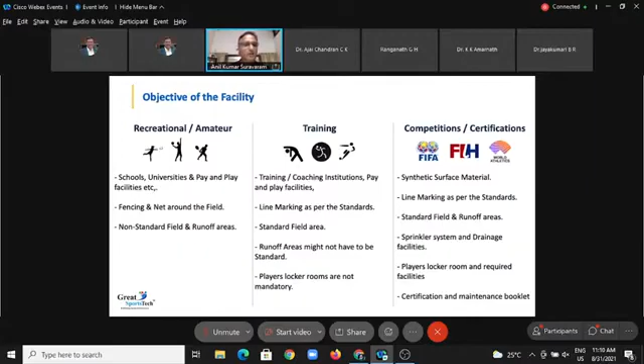Going to the specifics of the sports surface - some of this may be familiar to many, but not as familiar to all. As you know, for all outdoor fields, right at the time of planning the overall campus, you need to make sure you are leaving sufficient space with the right alignment, or orientation, so that you have a geographical north-south alignment for the field.

All outdoor fields, whether cricket, football, athletic tracks, or any other field, will always be north-south. This has to do with preventing the rising or setting sun from falling in the eyes of the players or the goalkeeper. It's important that you leave aside the total width and length required - for example, for an athletic track - because if it's in an east-west direction, you will not get a World Athletics certification, the IAAF certification.

So it's important that these are properly aligned, and the rest will follow. We need to make sure that when we do the site survey, it is done with a total station, marking existing trees or boulders. We also need to advise whoever is taking up the project, and tell them in good faith if any of these sites previously had trees that were uprooted, or had an old well or something - because without that knowledge, the contractor may not be able to give special treatment to that area.

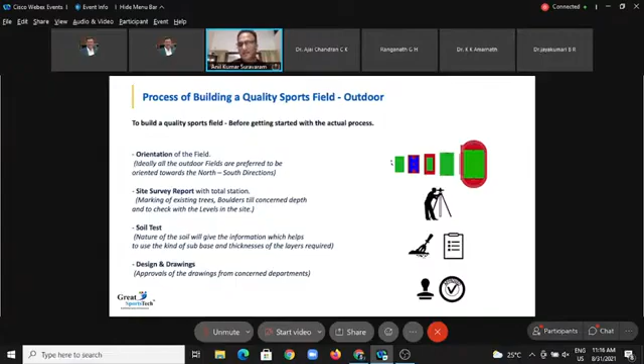So thank you for bearing with me on these two slides, which I feel a lot of you may be aware of. Again, at the cost of repetition, I wanted to summarize because these are really something that will make a big difference on how well we utilize our investment.

Okay, having said that, just going into a few things here when you're talking about, for example, an indoor facility. Are you making sure that, like I spoke about the height, the height is sufficient? Is the floor area planned well? Is it going to be catering for multiple sports?

Most of the facilities we are likely to build may not be able to afford to be exclusive for one sport, especially when doing indoor. An indoor facility and indoor stadium is a very expensive proposition, so you have to make sure that the length, width and height suffice to cater to as many sports as you can. Ideally, it should be no less than 8 or 9 sports.

There are many surfaces that allow you to conduct many sports, especially polyurethane or polyvinyl chloride, what is called cushioned PVC, like Taraflex or Omnisports. There are also wooden floors that are very popular and very long lasting, and they are good as well. Sometimes you may need to have some mats on that.

The point is, everything from the color in the background matters. For example, because you're using a white shuttle, you cannot have a white color background. The seating should be of a color so that the shuttlecock is contrasted against the seating background.

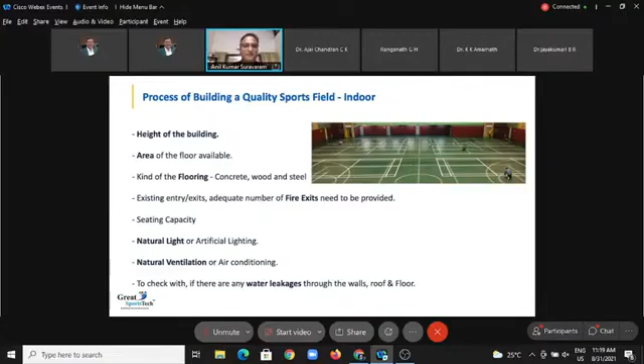Now diving into these specific surfaces, I'll be touching upon some 6 or 8 types of surfaces. I'm starting with the most simple and most common, something all of you are familiar with, which are called acrylic courts, or more popularly called synthetic courts.

Technically the name is an acrylic court. Anything man-made, anything not natural is synthetic, so just saying synthetic court may not be the correct term, because synthetic can mean acrylic, like in this case, or polyurethane, or polypropylene tiles—anything man-made. So it's always better to clarify as synthetic acrylic court.

These are also called hard courts and are very popular—I'm sure most of you have them in your campuses. They are popular typically for tennis and basketball outdoor. However, because of the lack of indoor facilities in many places, we may also use these for volleyball and badminton, which is actually not what they are suitable for. But nevertheless, these are less expensive, fairly good outdoor courts that are commonplace, so these are good to have.

Within these, people typically tend to say they want an 8-layer cushion system, which is good to have, but that is something you may need only at the highest level. Examples where hard courts are played at the highest level are the US Open and the Australian Open, among quite a few other tournaments.

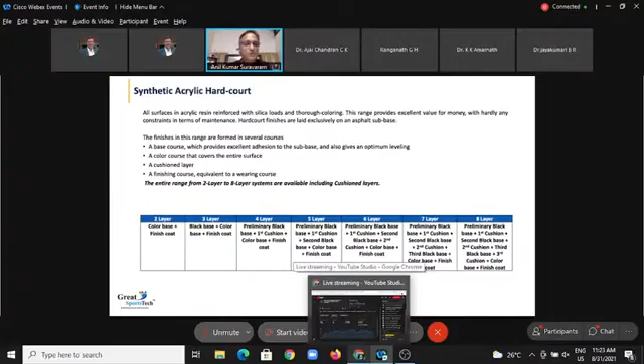These are good, but the limitation is that they are very susceptible to damage from wrong shoes. For example, if somebody comes with very hard shoes or spikes, the surface tends to get scraped. You cannot allow someone to play football on that. If students play football, the shoes they use may scrape the acrylic layer off. Or if people play cricket in colleges, where students want to play any game on any playing area not realizing the damage they may do, the cricket ball can again cause damage and erosion. Also, you cannot use this for non-sports activities, you cannot even place plastic chairs on it and risk scraping away the surface. So these are cost-effective surfaces, but they have pros and cons, and I wanted to touch upon those.

But the construction itself, typically, I will not go into each step, but basically a bituminous surface is the construction that is most preferred as a base. The bituminous surface involves treating the basic ground, then, starting from the left top corner, if you go down that row, you have a 40 mm stone layer, a 10-20 mm layer, then bitumen, and basically asphalting - a BMBC, which is a bituminous macadam, and a bituminous carpet. And then you do the leveling.

It's generally manual work because these areas are too small for sensor pavers to be operated. So there's usually a risk of some undulations, which is why the top right picture shows how, after doing a seal coat, we do a watering of the whole surface to identify any ponding. You have to remember that the International Tennis Federation allows some level of standing water, up to about 6 millimeters, 30 minutes after it has stopped raining. So there are some guidelines. You will generally not have a completely ponding-free surface - small spots people sometimes refer to as bird baths are fairly common. You use something called a leveling slurry to level them out as best as you can, and I'd emphasize it should probably be no more than 1 to 2 millimeters.

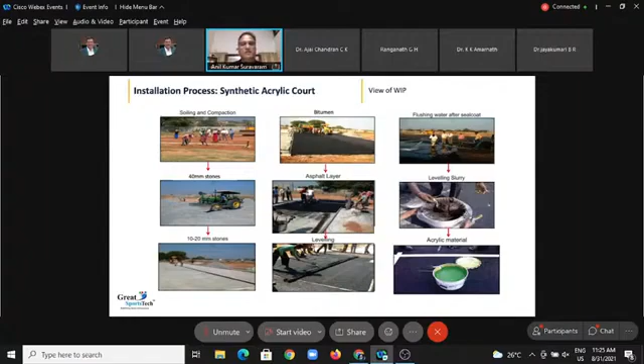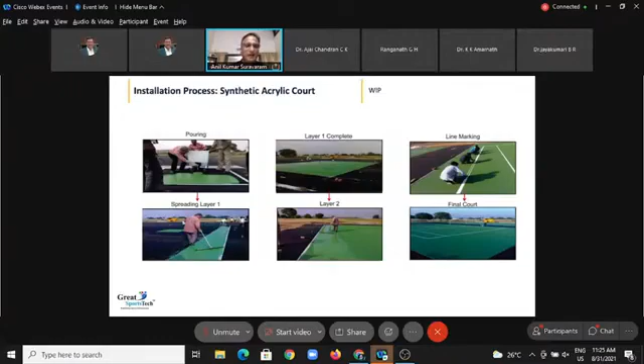In a tennis court, the slope is generally to only one side. Unlike a football field, where you may have slopes to both sides, in a tennis court it is typically only to one side, about a 1% slope. You cannot make it too steep, you cannot exceed 1%, and within that you have to do the best you can. So experienced court builders are preferred, who will be able to build a very good sub-base with the acrylic and bitumen, and then the acrylic surfacing is done. These are just the steps of how it's all done, and of course you have basketball courts, tennis courts, and various other types that people do have.

Now I'm coming to an option that's fairly popular in the recent past, both for indoor and outdoor use. These are a little bit more expensive than acrylic courts - I would say quite expensive. Just to give you an example, an 8-layer acrylic system may cost anywhere from about 80 to 100 rupees, depending on the quality of material and installation - that's just the acrylic surfacing. The sub-base cost may be different, that itself may be another 75 to 100 rupees per square foot.

However, a polyurethane surface alone, excluding the base, versus say at the higher end, say 100 rupees for an acrylic 8-layer, this could be upwards of 300 and typically even up to close to 400 rupees a square foot. So it is that expensive. But of course, this is much more long-lasting, much more cushioned, much smoother finish. Many benefits to this, but it is typically 3 to 4 times more expensive than an acrylic coating.

These are, of course, good. There are types that are suitable for indoor and certain types of polyurethane. This PU is basically polyurethane, which are suitable for outdoor use.

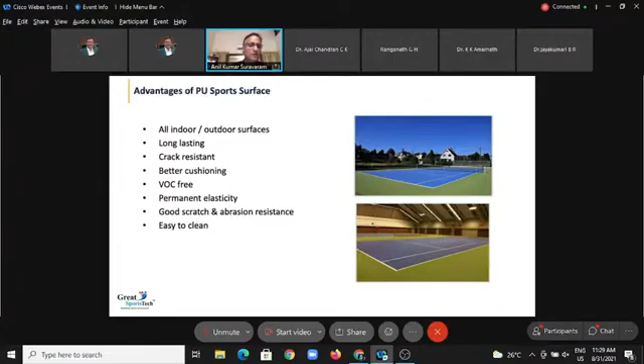So these are things that you want to be very careful about when you are using some of these synthetic materials. Make sure that you are getting them from a very good, reliable source. I would say that the standards of production typically in some of the European countries and in America are very safe to have. Even if they are a little bit more expensive, generally they are longer lasting and safer to use. Just my suggestion on those lines.

Like I mentioned, the bottom that you see here is the rubber pad layer, and on which you have various other layers that come in and finish off with the polyurethane layer. You have an intermediate layer, you have a solvent-free top coating. I don't want to go into too much detail, but this is broadly how these are, so that we are able to touch upon more of these without losing too much time on any one of them.

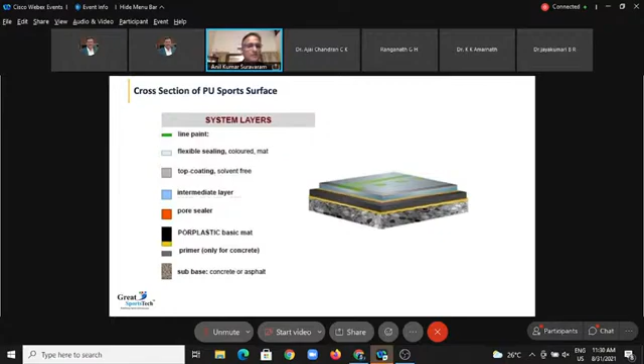This is how a good polyurethane coat can look. This can sometimes be similar to how it will look even with polyvinyl chloride, the PVC, Tarkett, Omnisports, or the Taraflex kind of coats from many suppliers. So these are the kind of surfaces with polyurethane.

However, in the recent past, there is something that has come that is called a hybrid PU. So this is actually having a combination of both acrylic, where you have the acrylic layers at the bottom and the polyurethane layer at the top. So somewhere these are turning out to be not as expensive as a polyurethane coat, but they give better cushioning, less ponding, better finish than an acrylic coat. So they may be, for example, only 50% higher cost than an acrylic coat, not a 300% higher cost like a PU coat.

These hybrid polyurethane coats are beginning to be quite popular. We are doing quite a lot of them now, and users are extremely happy. There are some sites done in Bangalore as well, including schools and corporate campuses. I won't go into too much detail, but essentially acrylic layers are done first, and later polyurethane coating comes on top, giving the best of both worlds.

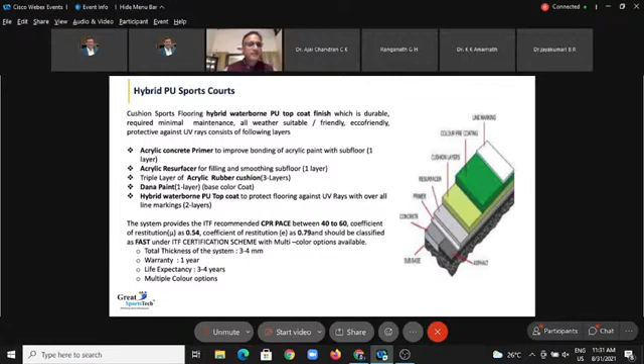Sir, you are muted. Can you unmute yourself? Sorry. Yeah, I didn't want to go into too much detail about the comparison between acrylic and hybrid. Briefly, I mentioned the 2-3 key points.

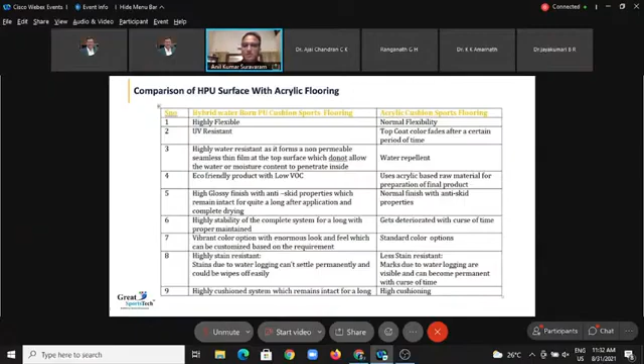This is what it actually is. Then we have what some of you may be familiar with - interlocking modular tiles, also called interlocking modular sports tiles or interlocking modular polypropylene tiles, because PP is the material with which they're made. You have choices for both indoor and outdoor use.

This is an example in Bangalore itself, in Tesco, where we've done an indoor court used for badminton and various other sports. But there are many examples of how they could be used outdoors as well. They are very long lasting - typically over 20 years, maybe even 25 years.

They have different levels based on the surface underlay - could be with cushion systems, rubber cushioning, or just directly on the surface itself. By the nature of their interlocking design, they can be permanently placed, but they're obviously portable as well. You can dismantle the entire court and move it elsewhere later if needed.

For whatever reason - a new building coming up, or whatever - your investment is reasonably protected. Being outdoor grade material, there are no issues about rain. And if the base is good, there's no risk of water standing. Very easy, high ease of maintenance.

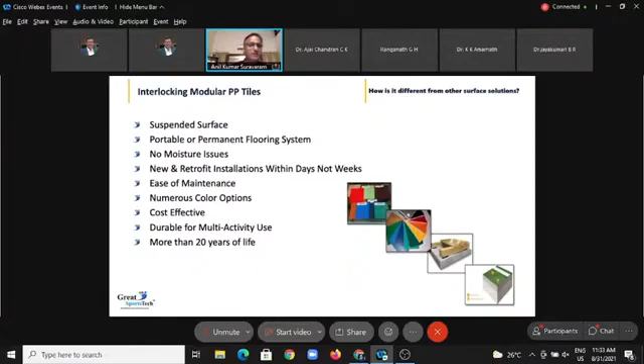You can also use these for multi-sport and multi-purpose activities. Most of these are typically approved by FIBA and by ITF, the International Tennis Federation. They're also good enough to place furniture on and have any event. For example, here's how the ShockTower - some cushioning is provided by rubber shock towers.

These are actually polypropylene tiles, but with just a wooden color laminate on top. This is not a wooden surface, but it can give you a wooden kind of finish, just to look like a wooden court - these are polypropylene. This one is a maple finish, but of course it has nothing to do with maple wood as such. So you have options like these.

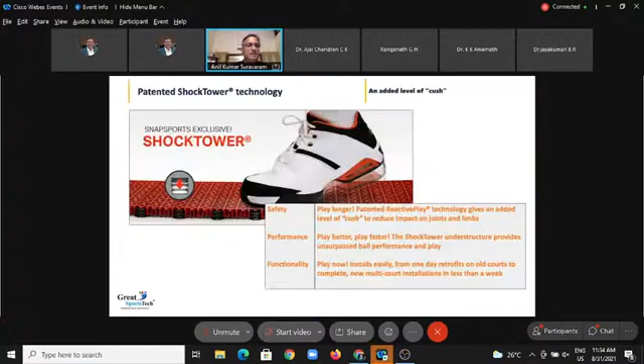There are instances - let me see if I have an example - where schools use this in an indoor hall, which may double up for play areas during the day. It can also be used for stage events - a parent-teacher meeting, an annual day, a cultural fest, or even a cafeteria. So these polypropylene tiles are, in that sense, very versatile, suiting various purposes - truly multi-sport and multi-purpose.

You can, of course, do multiple line marking, which is what you should look to do on any surface, indoor or outdoor, especially in a university context, where you try to provide students with as many sports as possible that can be played on a single surface. This provides you those options to do multiple line marking.

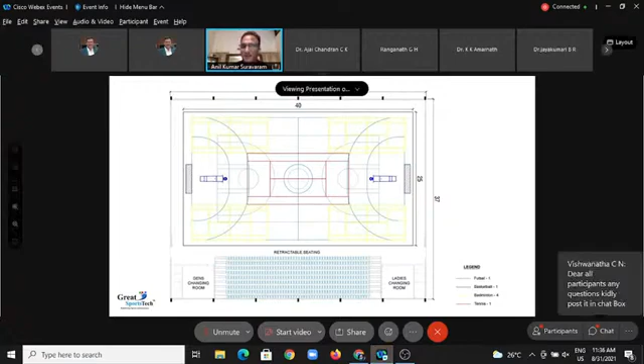Again, this is an example of how, even for an indoor facility, you need sufficient planning - same holds true for outdoor. You can see that with various colors, different sport markings are provided. When you look at it like this, you may wonder if the sports person will get confused. But I'm sure all of you are sportsmen, as have I been, and we know that when playing a certain sport, our mind is sharp enough to pick up only on that particular sport's line marking.

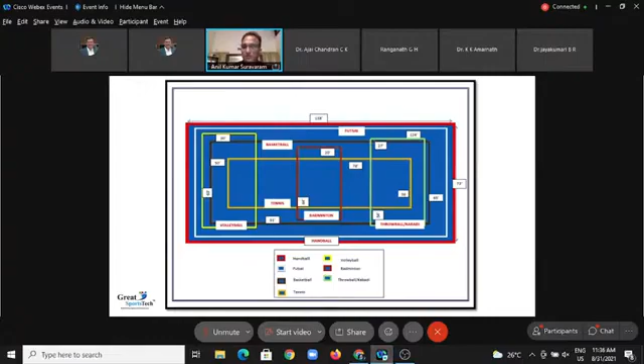So these are ways of how you can accommodate various needs when we are speaking about multi-sport and multi-purpose facilities, the fact that whether an outdoor or indoor facility can be designed to cater for various sports like these. So these are some examples of where they have been done.

Now I'm coming to the cushioned PVC. We spoke of it briefly earlier, what some of you may be knowing as Gerflor, what may be known as Taraflex, and what are known as Omni Sports or various other such systems, which are cushioned PVC flooring. They come in rolled form, with thicknesses ranging anywhere from 3.5 millimeter and going up to maybe almost 9 millimeter.

As you can see here, I'm giving an example of a 6.5 millimeter intermediate level, where the thickness is usually made up mostly by the rubber layer below. Only the top 2 millimeter is what is called the wear layer or the PVC layer, actually the polyvinyl chloride layer coming on top. So the more thickness you have is only to provide more cushioning, and certainly the lowest level thickness is sufficient enough to play.

It is very inexpensive, but it may not provide the best cushioning. However, the intermediate range like 5 millimeter, like the 6.5 millimeter, are very useful and appropriate for a university or a training level facility. And only the 8.5 millimeter, 9 millimeter thicknesses are the ones that may be required only if you're hosting a national or international level competition. In this context, I must also mention that you do get portable rolls as well of PVC.

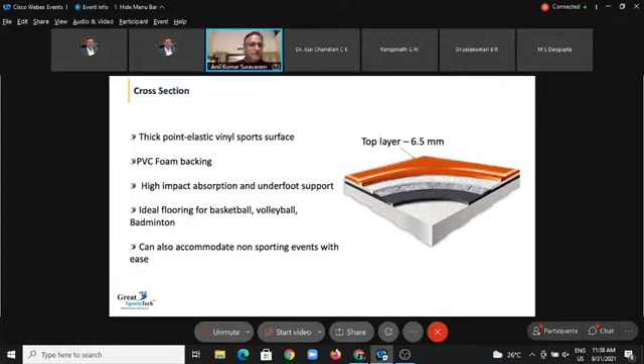For example, many of you have heard of these Yonex mats, and nowadays Li-Ning also does this. There are many other companies, including Target or others, who do portable mats that may be suitable for badminton. These are typically, because of the fact that they have to be portable and easy to handle, only in a 3.5 millimeter and no more than 4 millimeter thickness. So that's where you have the portable option also with these surfaces.

Of course, cushioned PVC is suitable for large areas. When you are going to use it for non-sport events, you can cover it with some protective surface like a tarpaulin and place simple light plastic chairs on top, using it like an auditorium for non-sport purposes. But these surfaces typically are very, very versatile. Again, they are certified and suitable for almost every indoor sport, from handball to volleyball to badminton to basketball to tennis, you name it, they are suitable.

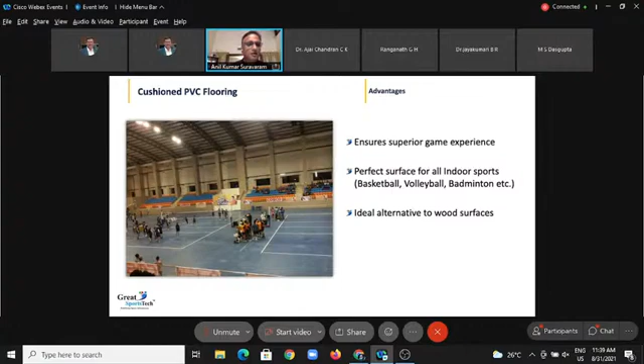So PVC cushioned flooring is really a good choice as well, including other options like polypropylene tiles. There are also polyurethane surfaces. So there are all these benefits that you have with them. I think I touched upon some of these points already. There are some installation aspects that I'm not going into too much.

For example, I spoke earlier about the dampness that may come from the ground, even through concrete flooring, and how we usually try to make sure, first of all, that the concrete floor itself is extremely leveled. Unlike outdoor, where you have to provide a slope for rainwater to flow away, indoor, you always have to have what is called a 0-0 level, a complete 0-0 level. It has to be an absolutely flat surface.

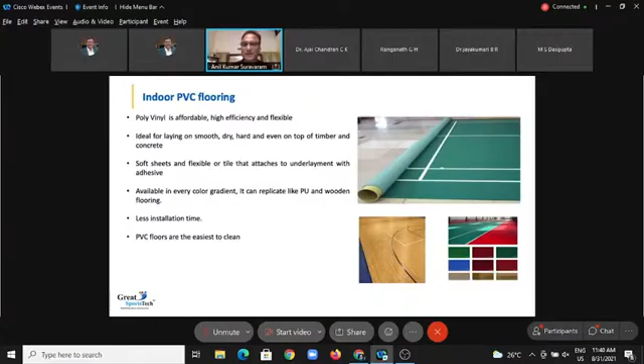A VDF kind of cement flooring is done, and there are many ways to make sure that it is 100% flat flooring. Apart from that, prior to laying all these surfaces or even laying a wooden floor surface, there is a vapor barrier. It is very thin, like a few millimeters, up to 6 millimeter. A vapor barrier is laid, which prevents moisture from below coming up through the surface and affecting your sports surface. So those vapor barriers are really important to have. With these finished surfaces, you can even get them in wooden finish also, like with the polypropylene tiles I mentioned. Even in cushioned PVC surfaces, you can get a wooden coat finish if people prefer to have that.

Going over to some of the turf related things, I'm giving an example of hockey turf here. I mentioned specifically hockey so you can see these huge water jets, with water guns as they call them, that are used on a synthetic surface.

Now you may wonder why a synthetic surface needs water. In the case of hockey turf, it's a very short fiber, and the nature of tufting is such that with very short fiber, these are typically much stiffer fibers, and they are very closely tufted. So you actually have a fairly abrasive turf used for hockey.

But the nature of the ball and the play are such that you cannot play hockey on what would be suitable turf for football, which may be a 50 to 60 millimeter tall turf with infill of silica sand and rubber granules. Here, there is no infill, you are directly playing on turf. Of course, below the turf, you have a shock pad.

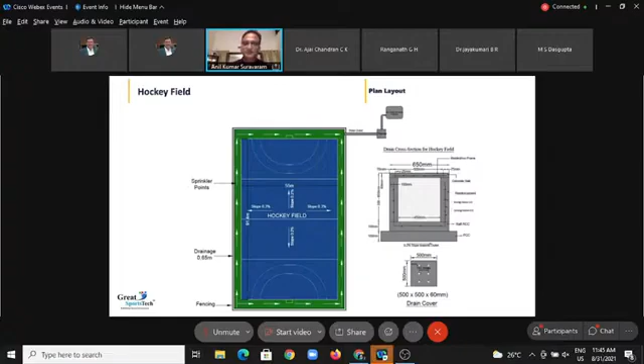There are details of the sub-base. This is also an asphalt sub-base, like a bituminous sub-base. And therefore, like I mentioned earlier, you will have some slopes for the subbase.

A bituminous subbase is fairly standard, except that you cannot bring in a road contractor and expect him to build a hockey subbase. This is a mistake many people make, in fact many governments and sports departments do. We struggle to explain that whatever standard rates are defined for road contractor bituminous work, they expect us to do the same work for very high precision and very high quality hockey subbase. So that's a struggle we have.

But anyway, that's a different story. These subbase cross sections may also be available online. This is something we have done in-house internally for our clients.

So there are layers of how these fields are built, and every layer with what quality. There are tests as to how to test the material used, the density, how many kgs per square meter, the depth, overall thickness, and the porosity, various factors are calculated. You have a perimeter drain on the side to ensure that the watering you do for the field is slowly taken away, and even rainwater needs to keep going away.

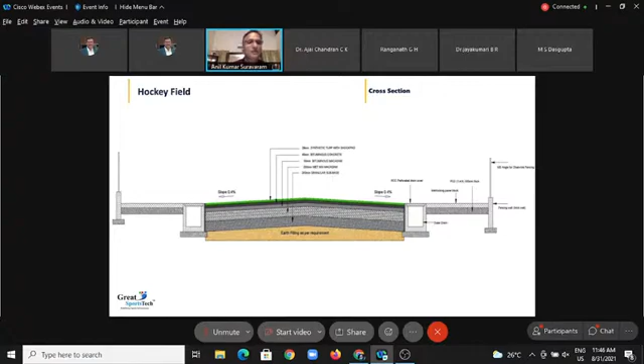So now you may know why you see that splash on a hockey field when they are playing. That's because it's actually intentionally watered. Blue color is a popular one, but green is really more common. And that's how we do that.

In terms of building a hockey field of the highest quality internationally, FIH have set down certain guidelines, and they have designated certain companies worldwide as FIH certified field builders. We are happy to say that we are one of the FIH certified field builders. The turf production also has certain standards, and they have designated some turf companies as FIH preferred suppliers. So these are a couple of things you can look into whenever you're looking to organize that.

Here are some pictures of how the subbase is built. I will not take up too much of your time on this — many of you are familiar with how these subbases are built.

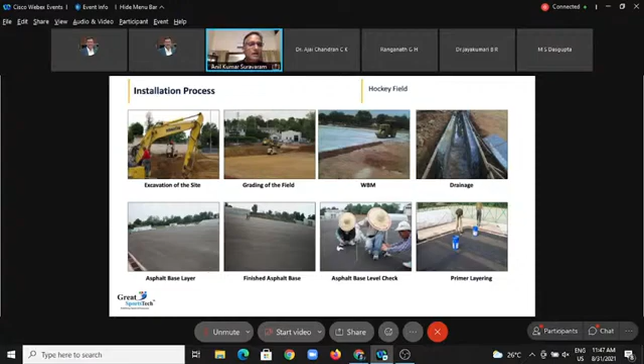And of course, then we do a shock pad layer. There is a shock pad below the turf, typically 15 millimeter, and it is cast in situ. The binder chemical and the rubber granules are mixed together in a mixer and laid with a sensor paver, conforming to the slopes, thickness, and everything.

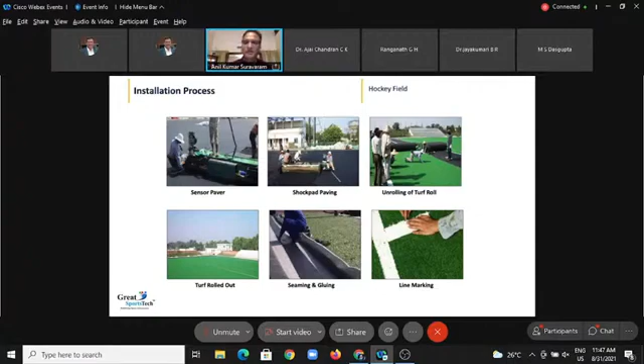And on top of that, we do the turf layer. This is how a finished field looks — I'm sure all of you have seen many of those, or may be having them as well. This is a field we have done in Secunderabad for South Central Railway.

Incidentally, talking of Karnataka, since most of you happen to be from there, we have recently finished a hockey field in Kodagu, in the Somwarpeta area. We have also done quite a few other projects — tracks, football fields, and other things — in various locations. There could be over 20-25 large projects and maybe over 200 medium-sized projects we've done in Karnataka.

I have some videos to play, but in the interest of time, I'll just skip them for now. I'm probably taking up way too much time. Dr. Vishwanath, if you can tell me how much time is remaining, I will try to finish the session in that time, please. So you can go ahead, sir. No issues. Okay, I'm sorry, I'm probably taking up much time. I'll try to expedite a bit.

Apart from the water-based system, where you do need water at this time, the international competitions are held on water-based systems, and therefore the highest level training facilities have to be water-based systems. They are expensive both to set up and to maintain, because you need typically 60 to 75,000 liters of water per session of play. So you really have to build, for example, a 2 lakh liter tank to store water, and sometimes people store much more because of the unpredictability of water availability.

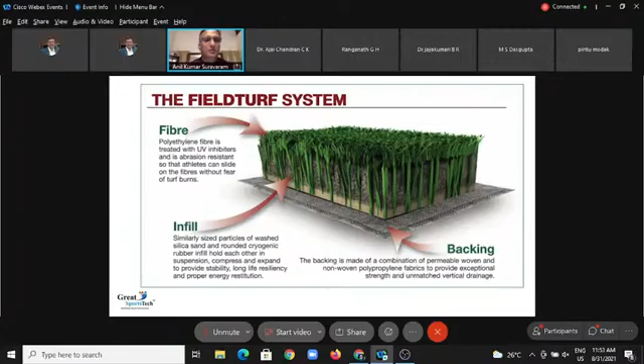So there are some defined tests, and there is a vertical deformation test as well. There are 7 such tests done at various parts of the field. If your infill ratio is not correct, your surface will be either too hard or too soft. Of course, there are ways people sometimes bypass this just for the initial test, where they may make the system sufficient for the initial test, but 6 months or 1 year later it may turn out to be too hard. So these are reasons why the infill is important to calibrate very correctly.

As you all know, the maintenance is almost maintenance-free, I would say. There is some minor maintenance, but I won't take up too much time on that. All-weather playability, you don't need watering. These are outdoor-grade materials. They typically run about 10 to 12 years with reasonable maintenance, and it can be a bit longer also. They are truly multi-sport, though they are primarily designed for football.

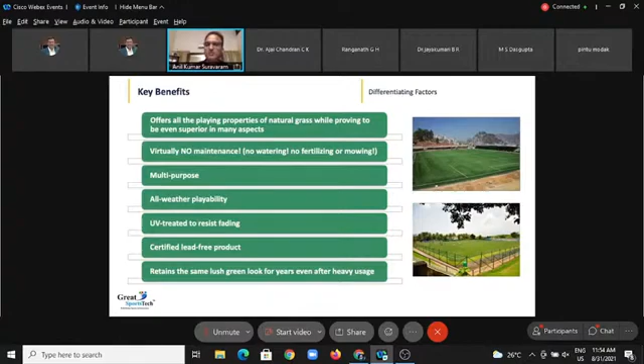Like I mentioned, similar to FIH's preferred supplier, FIFA has a program called the preferred producer. There are some 6 or 8 worldwide turf producers who are conferred with this category called the preferred producer. And like I mentioned earlier, FIFA certification of a finished field has 2 categories. Like I said earlier, it used to be called 1-star and 2-star. Now they are called FIFA Quality and FIFA Quality Pro. So those are the 2 varieties.

So it's a fairly soft subbase, and the rainwater actually percolates down through the subbase itself. It can be going into the ground, but because we have to keep a field ready for usage even during or after a heavy rain, there is a perimeter drainage system also that is done with some drain pipes.

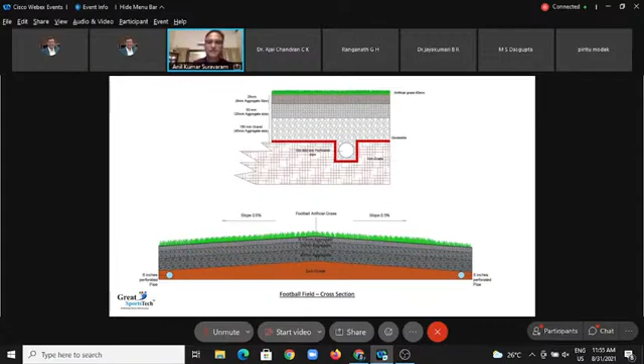Generally, these fields are designed to drain fairly fast. There are some designs, like in the case of FieldTurf, where they're designed to drain water faster than the pace of rain, so the play can continue even while it is raining. So this is a little bit on that.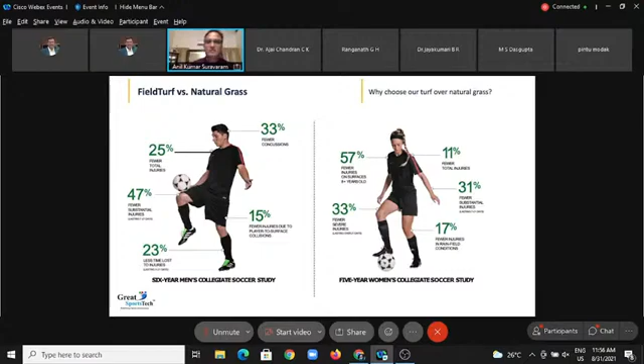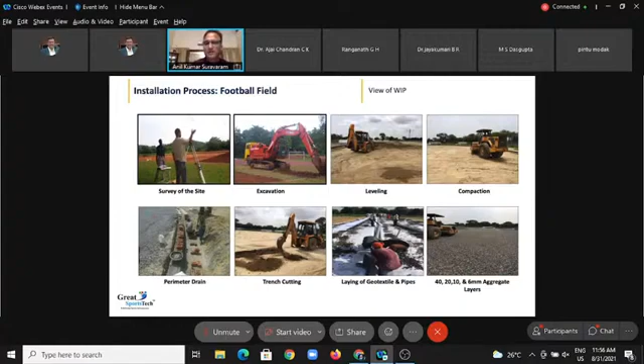I'll skip this slide, which is just basically the advantages or the pros and cons of field turf or synthetic turf versus natural grass. I've explained a bit about how the subbase is built. The initial levels are the same. After that, it's only a crushed stone base, finishing off from bottom with the 40 mm, 20 mm, and 10 mm layer, and then you have the 6 mm and stone dust kind of layer.

And then you get into the turf laying, where there are ways of doing it, stitching or gluing, and stitching is usually the most resilient. And then how you infill the whole thing.

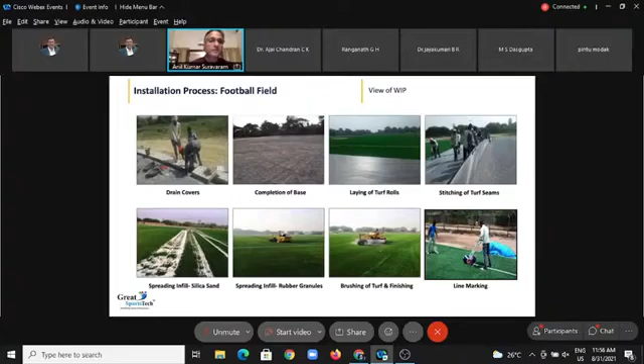When I say infill, you have to put in a lot of silica, sand, and rubber. Typically, a football field will have almost 280 to 300 tons of infill. You may have about 160 to 180 tons of sand and about 100 tons of rubber. So that's the amount of infill that will go into a long pile field.

Coming to synthetic turf for multi-sport, the same turf is used, though it is not actually meant for athletics, but in some schools they may lay it in the shape of an athletic track, and inside they may use it. It is also at an amateur or recreation level, they may use it for volleyball or for cricket academies or a children's play area.

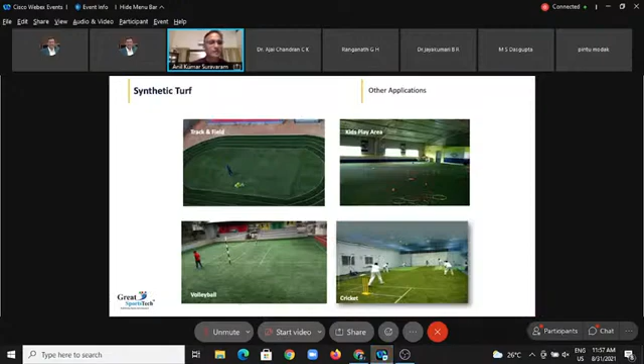All these are fine. Incidentally, for volleyball, we have done probably hundreds of courts, especially for the defense, Indian Air Force and others, who find this a very good recreation thing, injury-free and maintenance-free, better than the normal hard ground courts that they would generally have.

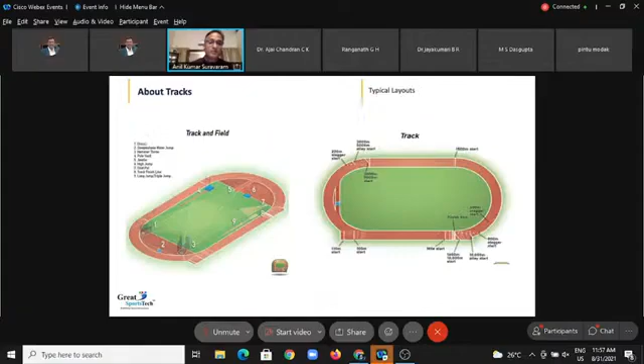Synthetic athletic tracks, again, something most of you are familiar with, so I won't take too much time on dimensions. You need to be aware that you don't always necessarily need a 400-meter track. You can many times make do even with a 200-meter track if it is at an amateur level, or if there is a constraint of space or budget.

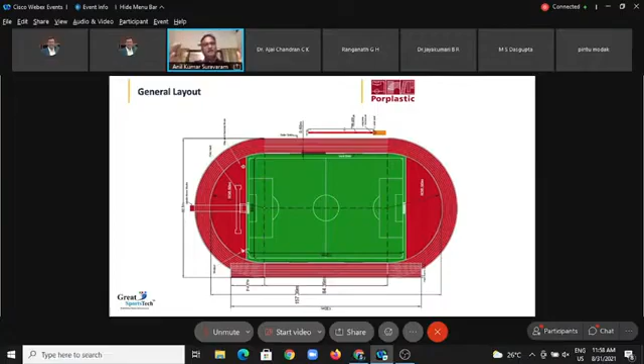And unlike a 400-meter track, we should not visualize that the 200-meter track is half the size of a 400-meter. A 200-meter track is only 1/4 the size of a 400-meter track.

Sorry, just give me one minute, please. Okay, I'm back. Sorry, I had to just, there's some noise in the background.

Blue color tracks are very nice to see, but you don't necessarily need to invest in a blue color track. They are more expensive, being very susceptible to ultraviolet rays. You need to have a UV seal coat that is done. We have done some of these tracks, but mostly the terracotta, brick color tracks that you see are more common.

Athletic tracks, as you know, are long lasting, and of course also very expensive. A typical 400-meter track could have 6 lane, 8 lane, or 10 lane. This is an important point, because you don't need a 10 lane unless you're actually going to host the Olympics. Otherwise, most tracks, even at the international level, actually have only 8 lanes.

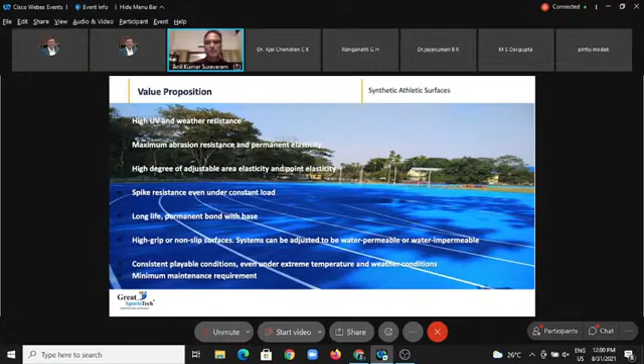In this, you have 2-3 varieties. The most popular is actually what is called the full PUR. You may have heard this term, full polyurethane. This is basically full polyurethane.

Basically this means the athletic track is laid in 3 layers, and all 3 layers are going to have polyurethane, which is really the heart and soul of any athletic track. This is called full PU, or full PUR. It is more expensive, and each layer is done with polyurethane mixed with rubber granules.

The polyurethane is what gives the color to the track, and if you use a terracotta, brick, or maroon color polyurethane, you'll get a maroon colored track. The top layer that you see is usually finished with EPDM granules, as you can see here. The EPDM granules are of the same maroon color, and therefore you get a maroon track.

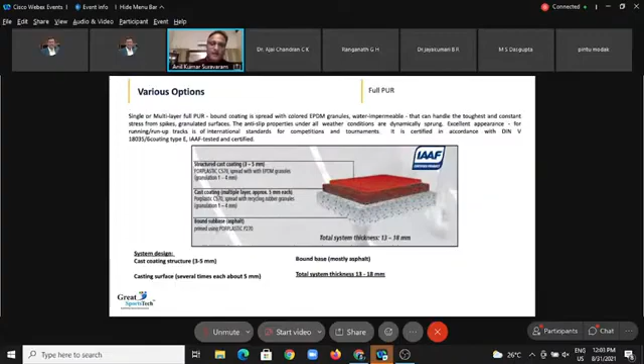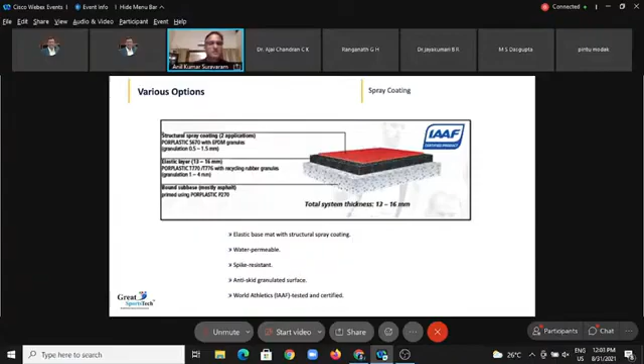Apart from this, there is another system not relevant for India, called the spray coating system. It's done where you have a 10 millimeter shock pad, but on top you just spray polyurethane with an airless sprayer. It is not at all recommended, please don't even consider that. It has many limitations.

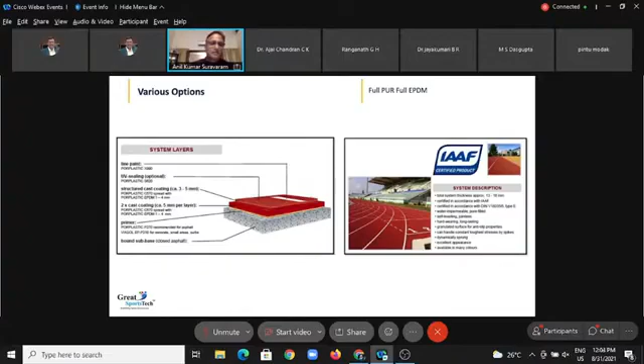So those are 3 types of athletic tracks. There is also a less common system called full PUR full EPDM, where in the bottom 2 layers, instead of SBR, EPDM rubber is used. It provides enhanced cushioning. We've done this for the Indian Air Force Center in Jalahalli in the Bangalore area, which has this full PUR full EPDM track. But it's probably too expensive for regular usage. I think a sandwich system or a full PU system suffices.

I've explained the sub-base construction process, and you've seen how the shock pad layer for a hockey field is done. It's the same for an athletic track. Then with the polyurethane, it is cast in situ, you actually pour it on the surface after doing the pore sealer and other such layers.

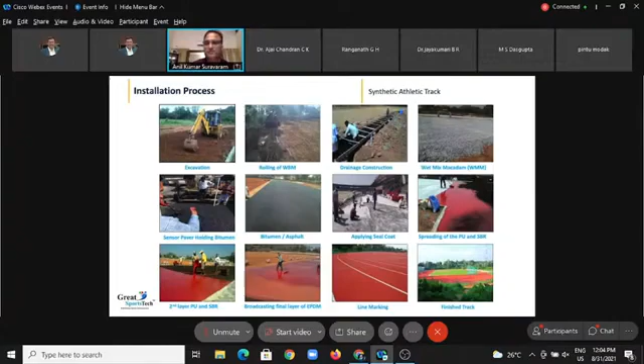Then using what is called a squeegee, like a wiper, you pull the self-leveling polyurethane liquid across the surface. Then you broadcast, spreading and throwing rubber granules on top until fully absorbed into the polyurethane. With spades, you shovel the EPDM rubber onto the wet polyurethane, which absorbs into the surface, and once it dries it becomes the finished surface. Like I said, there are class 1 and class 2 certifications.

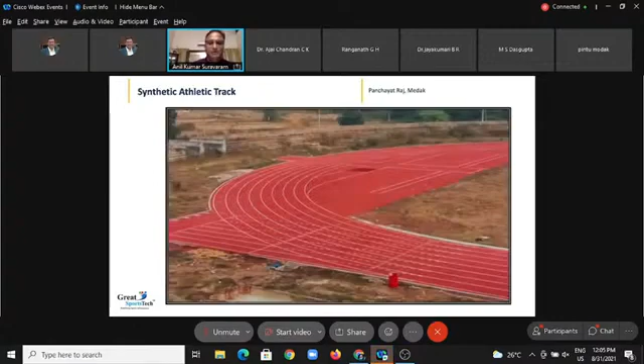This is how a synthetic track would look like. We have to touch upon that - just a rough idea, since we already covered the athletic track. The total area you may need: length and width, 90 by 45 is the play area for a national level.

100 in length and 64 in width is the minimum play area for an international level, but this excludes the runoff area. You need at least 3 meters or minimum 2.5 meters on the length and at least 2 meters on the side. So you generally end up with 2.5 meters on the length - adding that to 100 gives you 105. On the width, 64 plus 2 plus 2 gives you 68. So this is the basic minimum area you need.

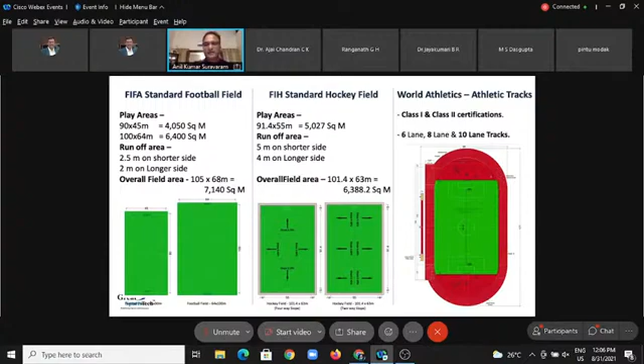After that comes the drain area, dugout, and fencing. Even in athletic tracks, you'll be able to easily calculate the total length and width you need to earmark - fairly easy depending on the number of lanes you have. There's a lot of information available.

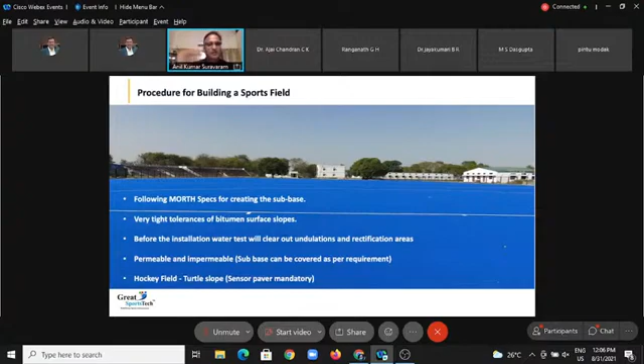This is a term you'll see very often - MORTH specifications, by Government of India, regarding construction of bituminous surfaces. They have to be minimum MORTH, but to conform to international standards it has to be far more precise than just MORTH surfaces. Then there's a classification of whether you have large granular or less granular, permeable or impermeable bituminous surfaces.

Regarding slopes - we've touched upon this in some context. For an athletic track, the slope is inward, unlike football and hockey fields where the slope is away. In an athletic track, from your outermost lane, the slope is inward. It also provides light banking, but more importantly, it allows water to flow inside, so an inner drain is actually more crucial in an athletic track.

Then there are high stress areas - typically long jump, pole vault, triple jump, javelin throw, and high jump areas. So instead of the typical 15 millimeter thick athletic track, those areas are typically 20 millimeter, and some are even 25 millimeter thickness.

There are many ways these areas can be optimally used. Sometimes people are able to make do with just 1D and not necessarily do 2Ds, so on a case-specific basis, we'll be able to advise.

Historically, natural grass has always been the preferred choice until the last 20 or 25 years, when synthetic surfaces became very common. Now, in the recent past, something has come up which is a mix of both - a hybrid grass solution, a mix of synthetic turf and natural grass.

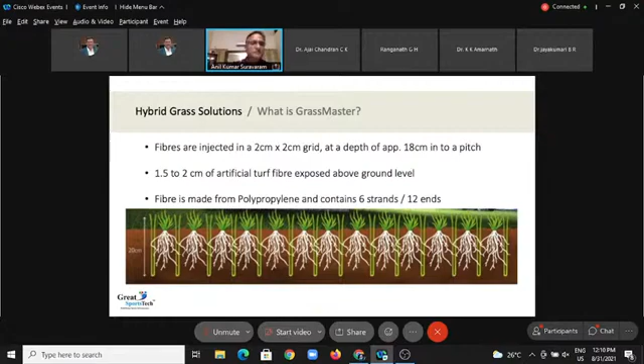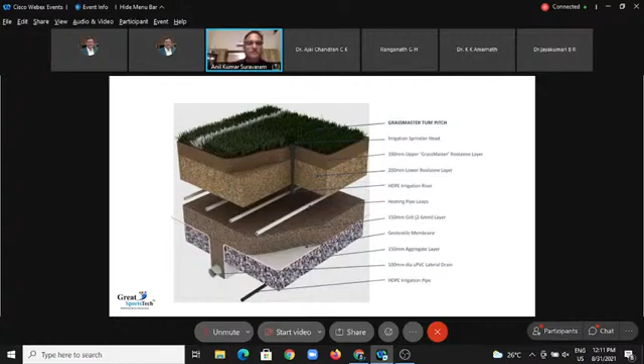So I won't go into too much detail, but basically there is something called a USGA base, a certain standard for a sand-based sub-base system that is built, and that is the grass growing medium on which we have the synthetic fibers. This allows for extremely long, healthy, strong roots to develop, which actually helps the health of the grass above.

In India, I wanted to mention - though it's not public information, I'm just sharing this within the group - we recently signed a contract to provide South Asia's first hybrid turf system for a club called FC Madras. They are building a very modern, high-tech football academy in Mahabalipuram, outside Chennai.

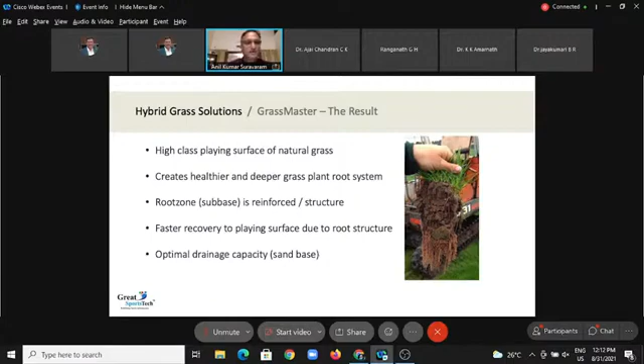We have signed the contract recently, so in about 6 months or so, India will have its first hybrid turf football field of FIFA standards. Hopefully everybody can try and experience that at some point.

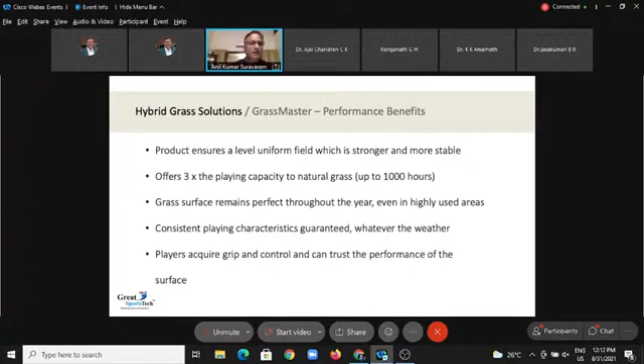There are many benefits to why elite clubs use this - better resilience, more playing time, a good grass surface that top players want, a cooler surface, and many other benefits. I just wanted to introduce the concept to you at this time, without making it a full session on hybrid turf.

But this is obviously more expensive than synthetic turf itself, and there is maintenance required too. So there are pros and cons, but for elite level and even national level stadiums, I'd say hybrid turf is the way to go. That said, from a one-time investment standpoint, with ongoing maintenance being almost zero, synthetic turf solutions would be best for many intermediate, amateur, training, or recreational facilities, as per my judgment.

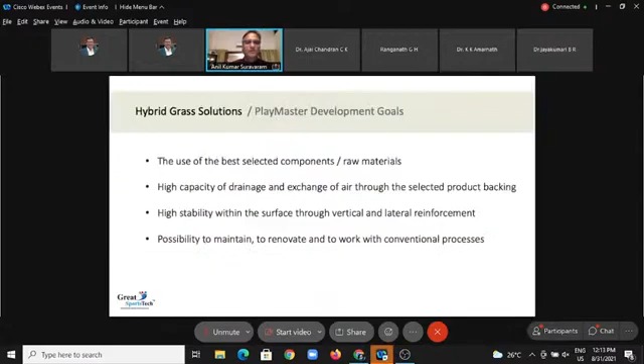This is pretty much most of what I wanted to touch upon. I'm just skimming through some of these hybrid slides, which probably aren't so relevant to go into right now. I don't know if I can play the video, but let's just move on in the interest of time.

So this is basically what I wanted to cover on various types of sports surfaces. There's tremendously more detail to go into, and I'm sorry I took probably much longer than I should have - I was just going with the flow, but on and off I saw comments that this was useful and beneficial, so I went into a bit more detail.